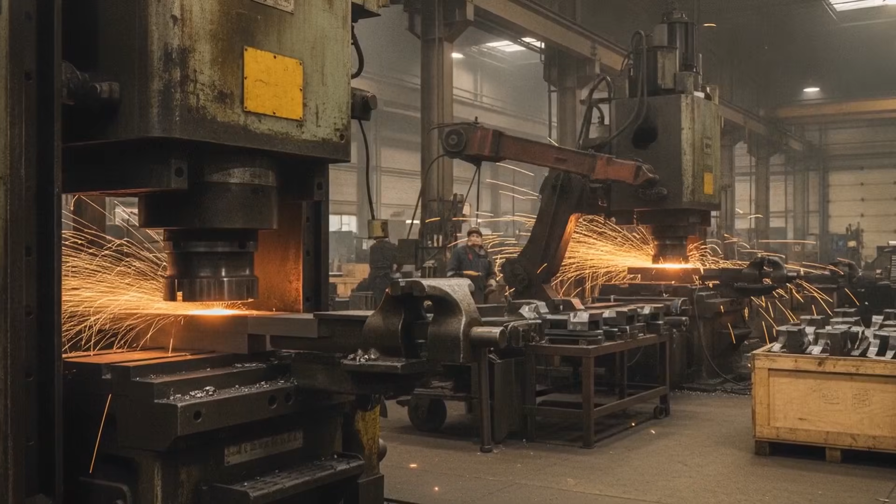In 2017, a private equity firm named Gamut Capital Management signed papers in New York to buy the company behind one of America's most trusted vise brands. Wilton wasn't struggling. Its factories were still running. Its name sat on workbenches nationwide, and mechanics had trusted it for generations.

This was the third time in 20 years Wilton had changed hands. Each new owner valued the name more than the shop floor that built it. To understand how a street corner in Chicago became a line on a private equity balance sheet, you have to go back to 1941, back to a Czech immigrant standing on a sidewalk with no company name.

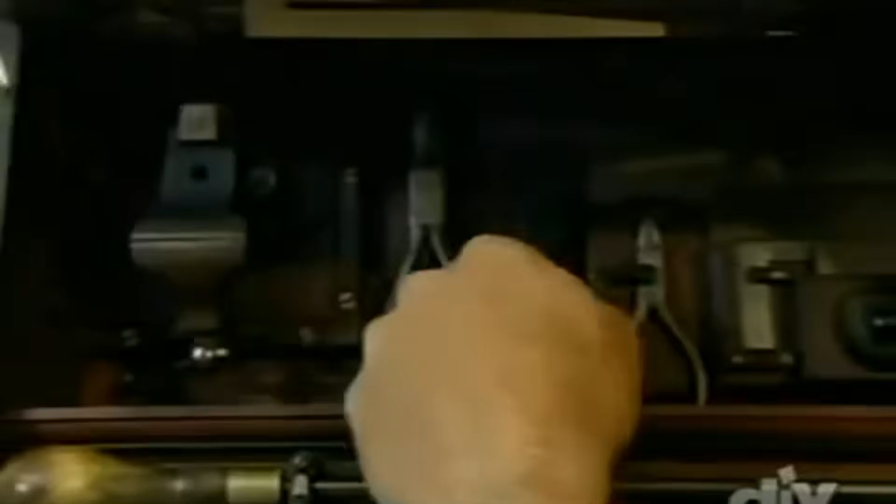His name was Hugh Vogel. He had just started a small tool business in Chicago, and he didn't even have a name for it yet. The story goes that a man walked up and asked him what his new company was called. Vogel looked up, saw a street sign, and said the first thing that made sense. The sign read, Wilton Avenue. His shop sat right at the corner of Wilton and Wrightwood.

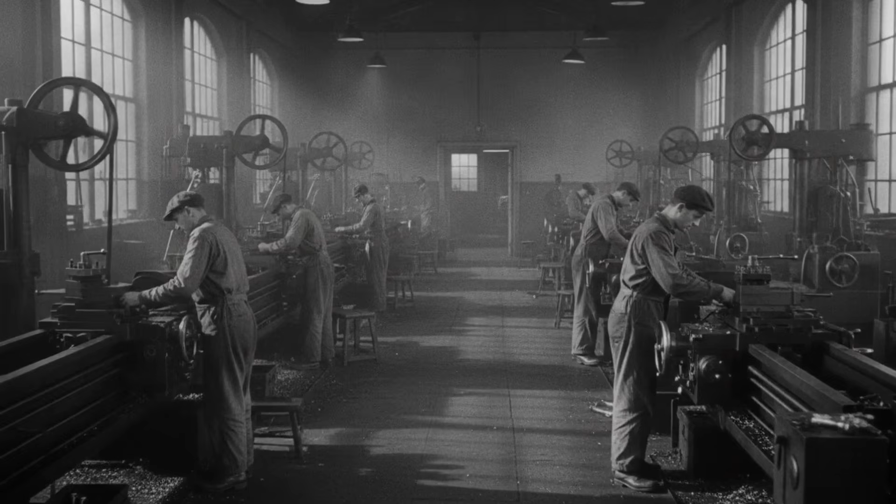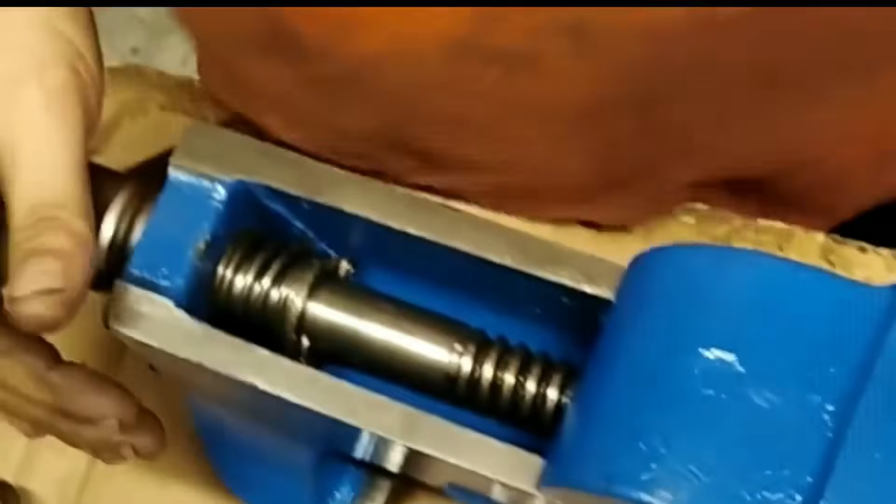That's the whole naming story. No boardroom, no marketing meeting, just a man on a sidewalk borrowing the name of the street under his feet. Vogel wasn't chasing a big idea. He was solving a problem he'd seen up close in machine shops around the city. Bench vises at the time had exposed threads on the spindle, the screw mechanism that pulls the jaws together. Metal shavings, grit, and oil work their way into those exposed threads constantly during a normal day of work.

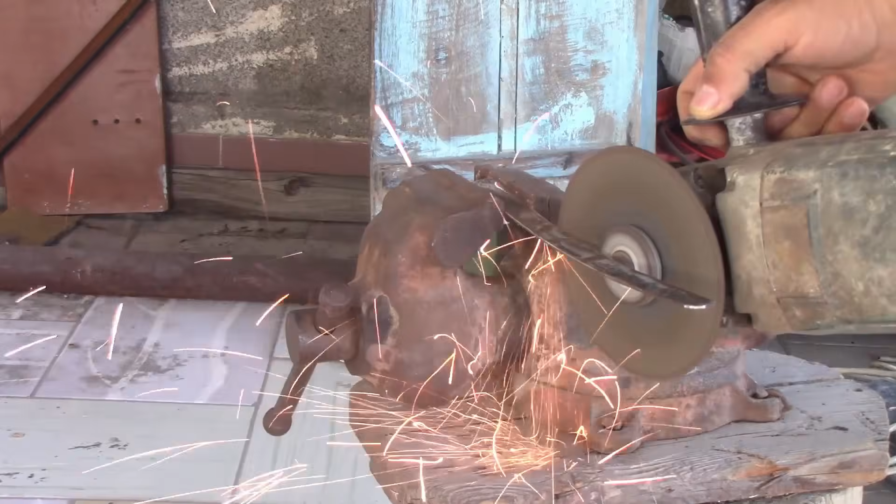Over time, the threads wore down. The vise got sloppy, and a tool that was supposed to hold a piece of metal rock steady started to slip. For a machinist trying to cut something to an exact measurement, a slipping vise wasn't just annoying. It ruined the work, and ruined work meant wasted material and wasted hours.

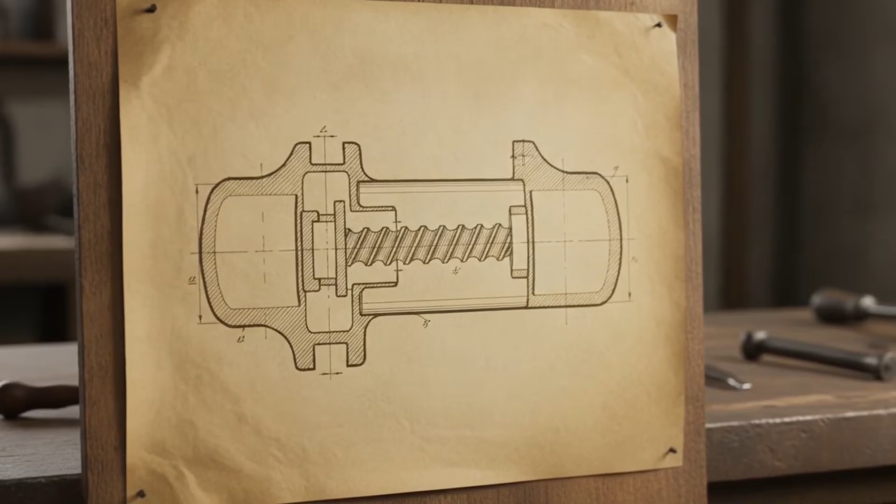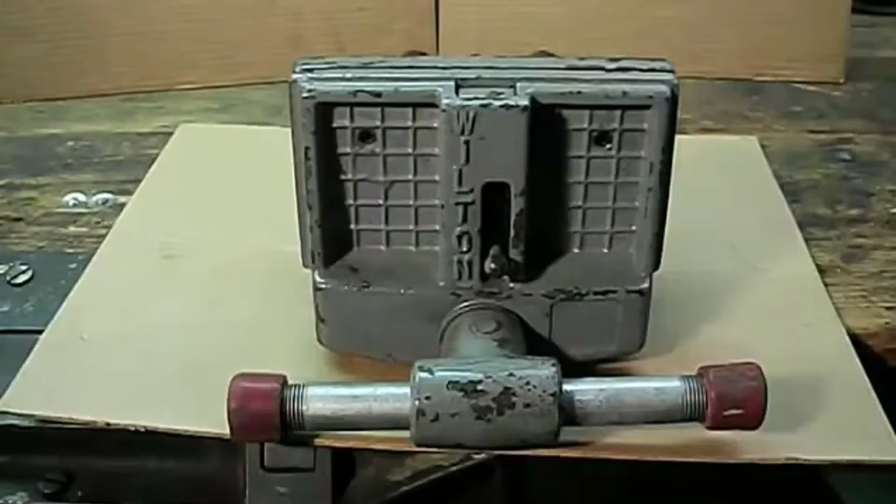Vogel designed something different. He built a vise where the spindle nut was completely enclosed, sealed away from dirt and metal chips. He shaped the whole assembly like a bullet, which is why it's still called the bullet vise today. The enclosed design kept the threads lubricated and clean. The pull on the jaws came straight through the center of the mechanism instead of off to one side.

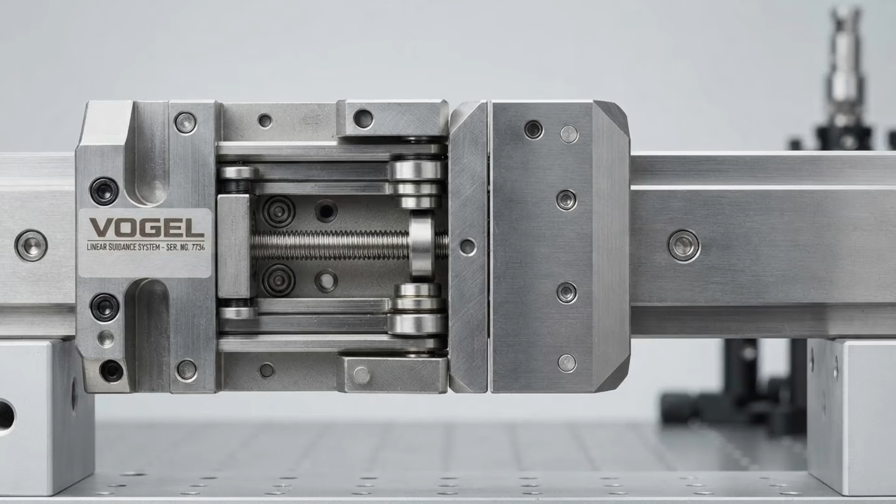That centered pull mattered more than it sounds. A vise that pulls unevenly twists slightly as it tightens, and that twist throws off precision work. Vogel's design didn't twist. It just closed, straight and solid every time, whether it was gripping a thin sheet of metal or a heavy chunk of steel. He filed for a patent on this design in August of 1941, only months after starting the company. That's a fast turnaround for a small operation with no track record and no outside investors backing him.

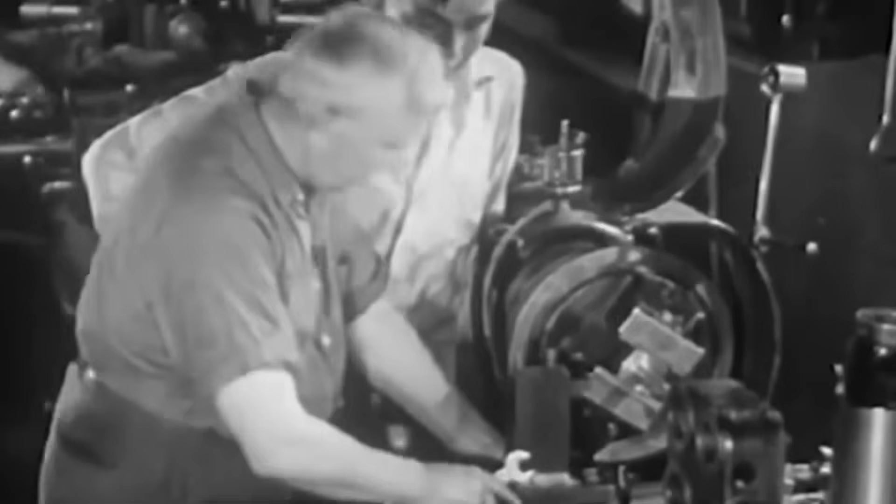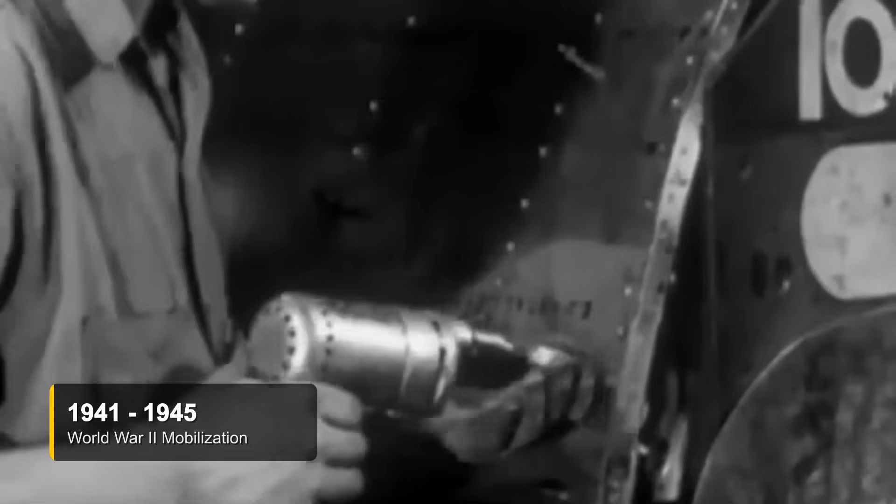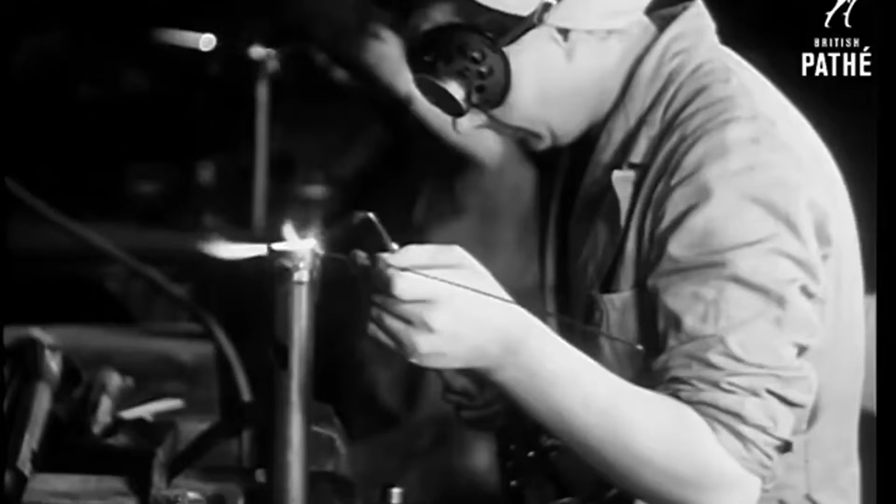But before Vogel could find out whether machinists and mechanics across the country actually wanted his vise, the decision got taken out of his hands entirely. The United States entered World War II, and for the next 4 years, from 1941 to 1945, Wilton's vises weren't sold to the public at all. They went almost exclusively to the federal government, built for munitions plants that needed dependable tools clamped to workbenches around the clock, running shifts day and night.

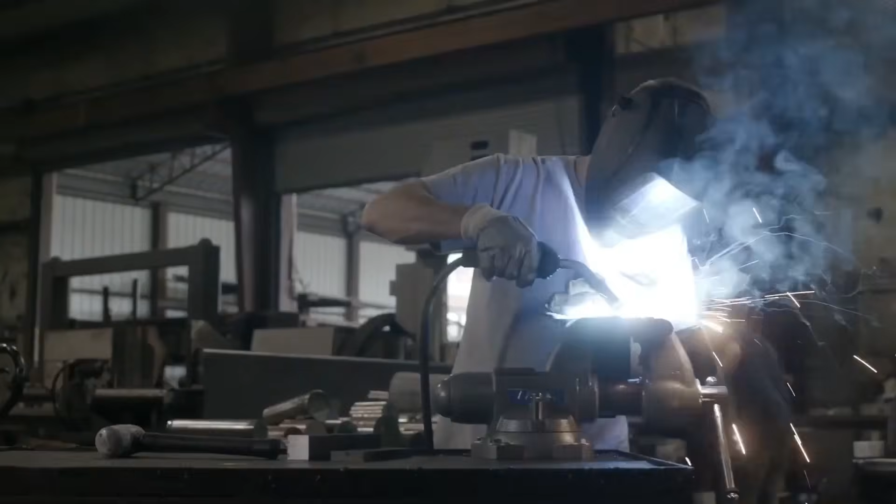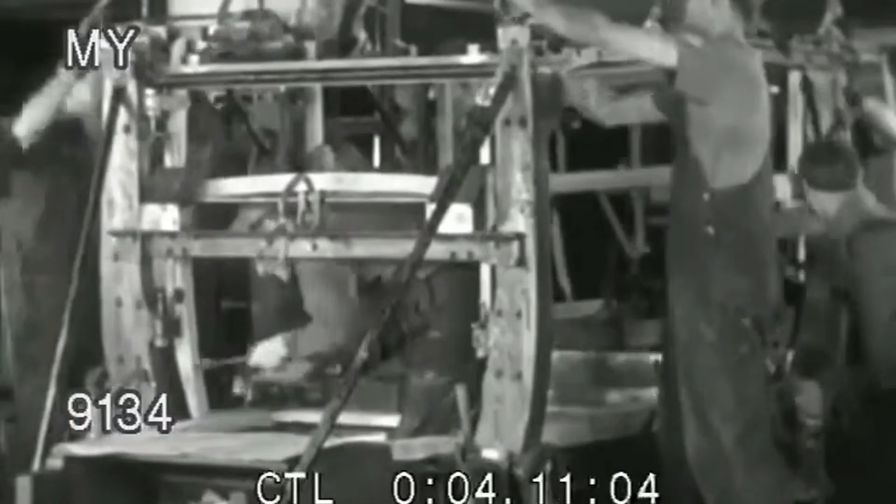This created a strange problem for a young company. Wilton had a good product and a growing reputation inside factories that were building for the war effort. But it had almost no name recognition with ordinary machinists, garage mechanics, or hardware stores. When the war ended in 1945, Wilton wasn't collapsing, but it also wasn't a household name. It was a 4-year-old company that had spent its entire existence selling to exactly one customer, and that customer was about to stop buying at wartime volume.

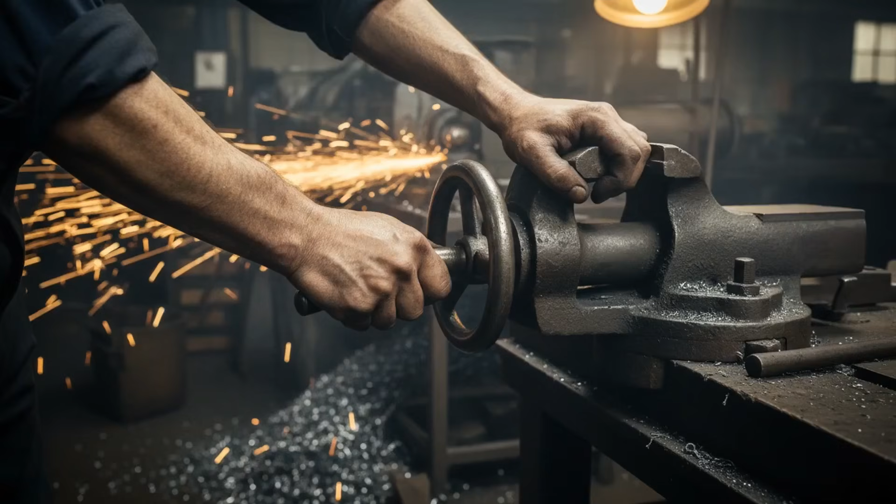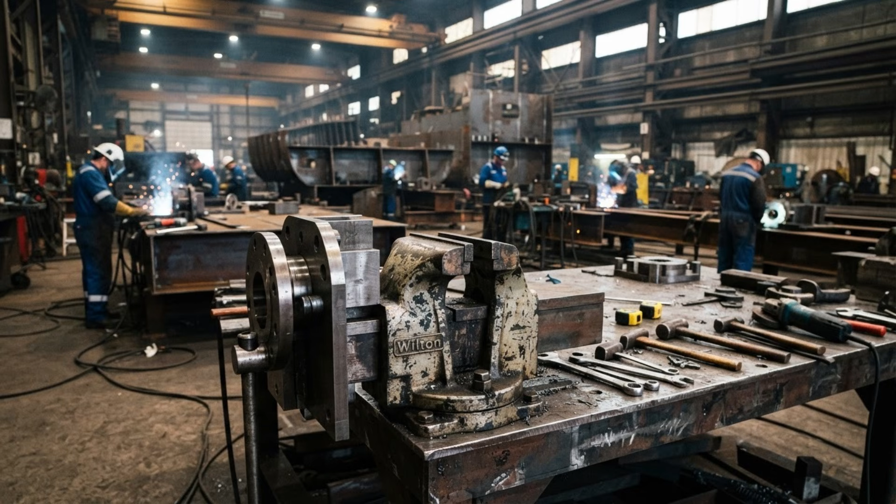What saved Wilton wasn't the war contract itself. It was who touched that vise during the war. Thousands of machinists worked in plants where Wilton vises sat on nearly every bench day after day, tightened down on parts headed for tanks, ships, and aircraft.

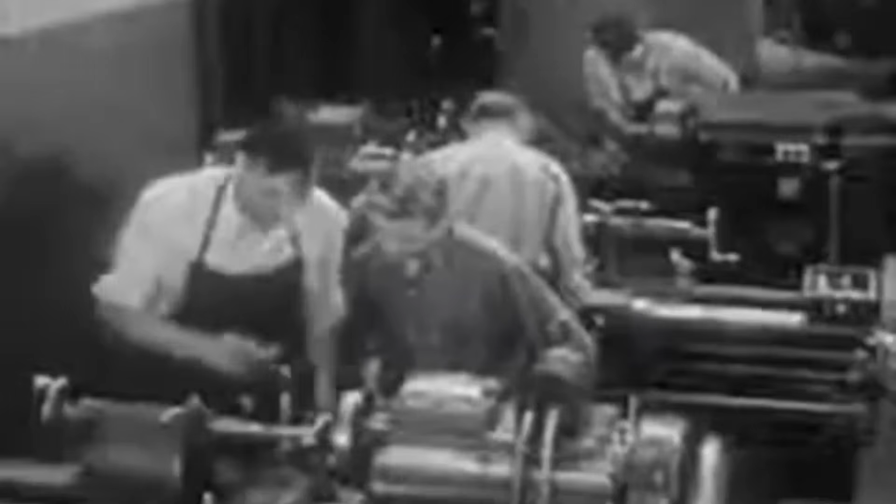Soldiers came home from the war and went to work in machine shops, auto garages, and factories, many of them having already handled Wilton tools during their training or their wartime jobs. When they needed a vise for their own workbench or recommended one to a shop owner hiring them, they already knew the name and trusted what it could do.

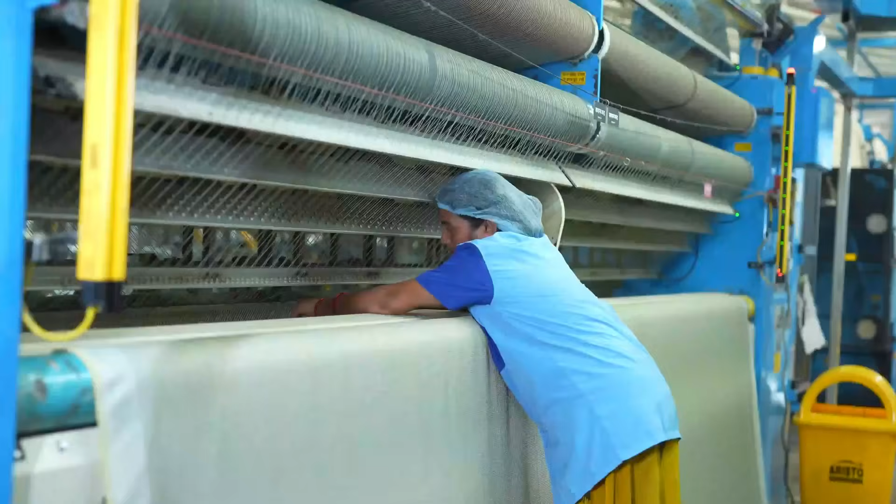The war didn't build Wilton's business directly. It built familiarity with an entire generation of skilled workers. And that familiarity is what turned into sales once the company could finally sell to the public again.

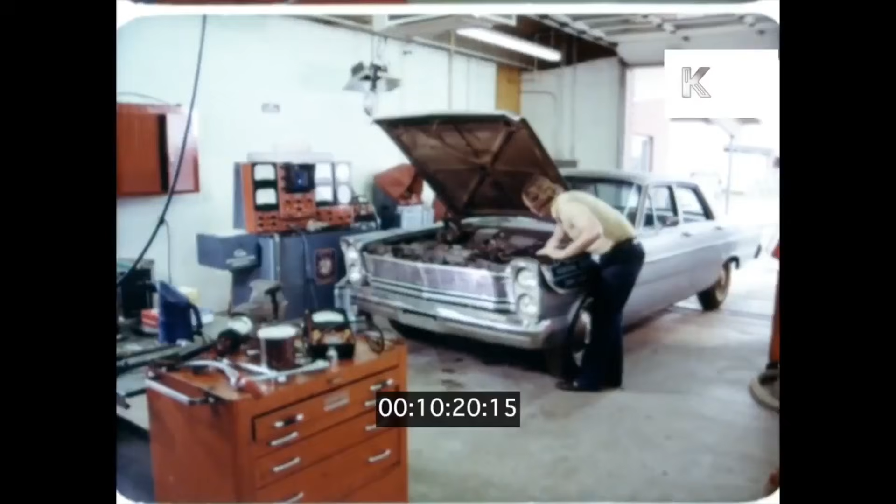Wilton made a deliberate choice after the war that shaped everything that followed. Instead of trying to sell through every hardware store in America, the company targeted the automotive supply distribution network, which was expanding fast as car ownership boomed across the country after the war. Auto parts stores and automotive supply houses became Wilton's main channel. That put the vise in front of exactly the customers most likely to actually need one, mechanics and shop owners doing real repair work every single day.

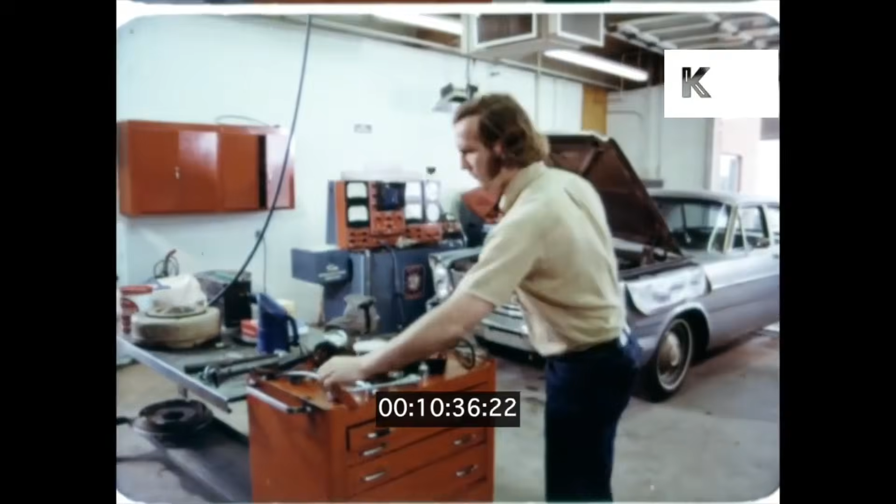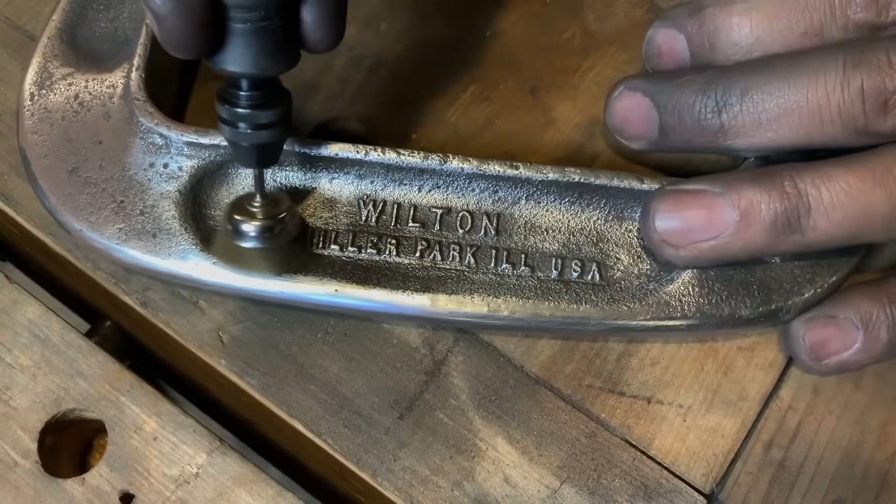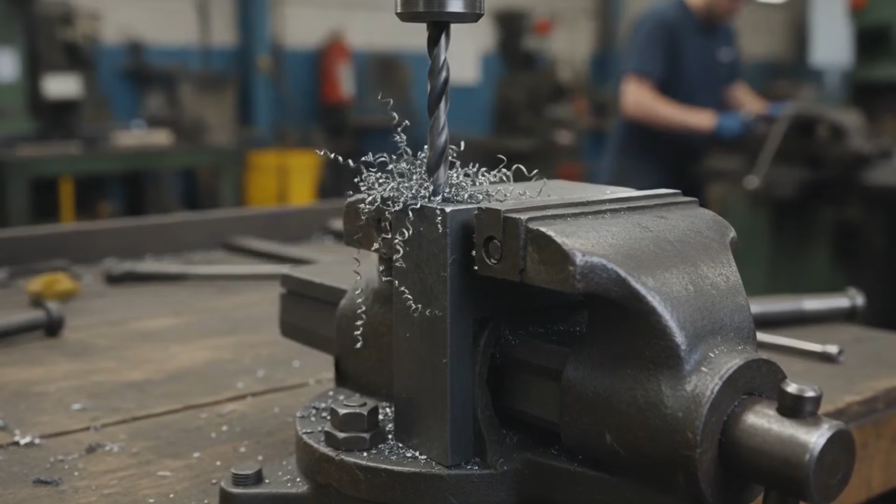In 1950, Wilton expanded beyond the vise itself, introducing its 540 series light-duty carriage clamps and its 900 series heavy-duty machinist clamps. These weren't small products. The heavy clamps were engineered to hold enormous force without failing or snapping under load. For a machinist, clamping down a piece of steel that was about to be cut or drilled, that kind of strength mattered. The clamp wouldn't be the thing that gave way and ruined the job, or worse, hurt the person operating the tool.

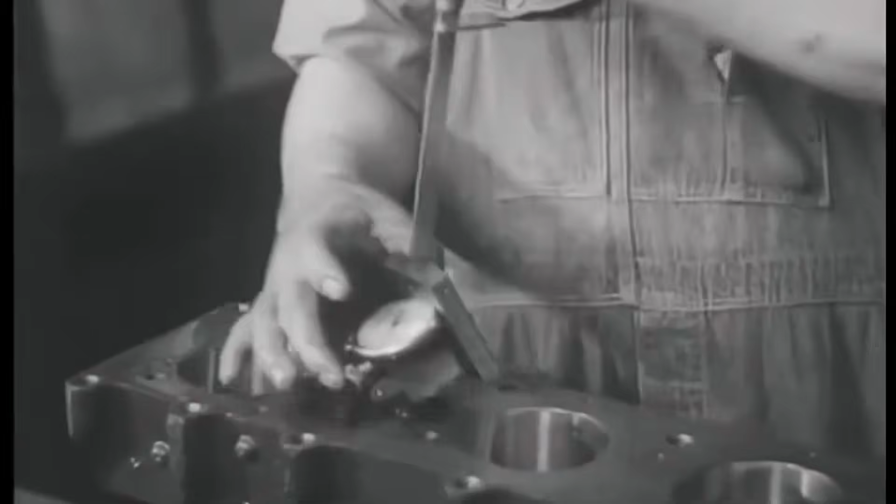Two years later, in 1952, Wilton brought in new leadership to build out a serious industrial distribution network beyond the automotive channel. This is where the company's knowledge started passing between generations. People who had grown up around the business took on more of its expansion, learning the products from the inside rather than being handed a title. That kind of continuity is exactly the thing that keeps a company's original standards alive as it grows past what one person could oversee alone.

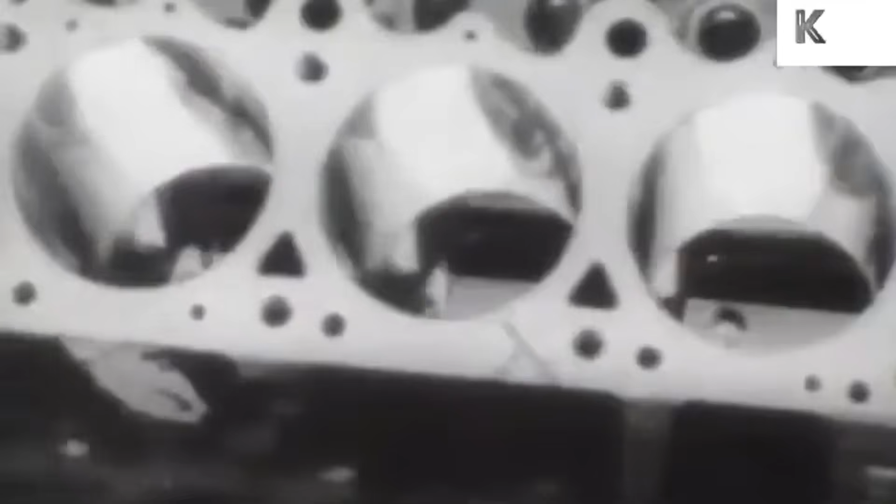By 1957, Wilton had outgrown its original Chicago location and moved manufacturing to Schiller Park, Illinois, a suburb with more room to expand production and add machinery. The move wasn't a sign of trouble. It was the opposite. Wilton needed a bigger plant because demand had grown past what the original shop could handle. The company was still independently run, still connected to the family that started it, just bigger and better equipped to keep up with orders coming in from across the country.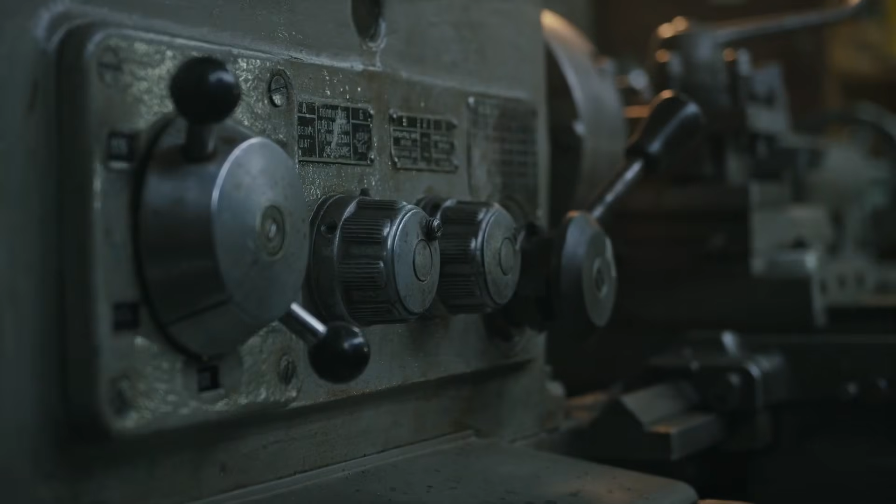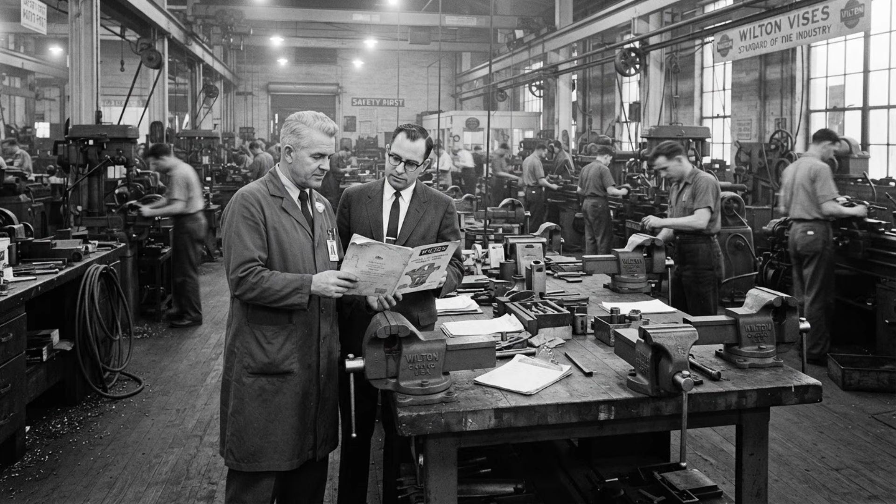The results showed up fast. By 1960, Wilton had become a recognized name across the industrial marketplace, and by 1965, it had become the preferred vise brand among professional buyers in that market. When a shop foreman or a purchasing manager needed to order vises for a new plant or a growing crew, Wilton was the default choice, not just one option among many on the shelf.

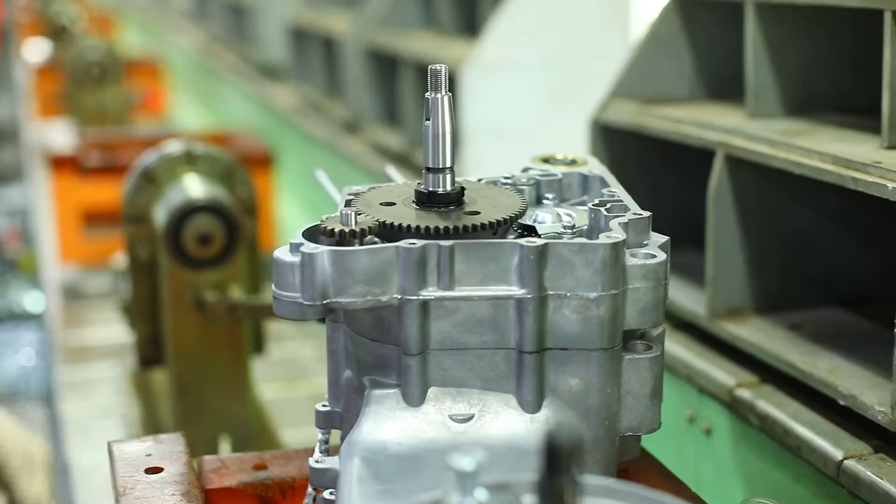In the late 1950s, the company also introduced the Pow-R-Arm, a work positioner that held a piece steady for an assembly line worker, so both of that worker's hands stayed free for the actual job. Another sign that Wilton was supplying the industrial backbone of American manufacturing, one workstation at a time.

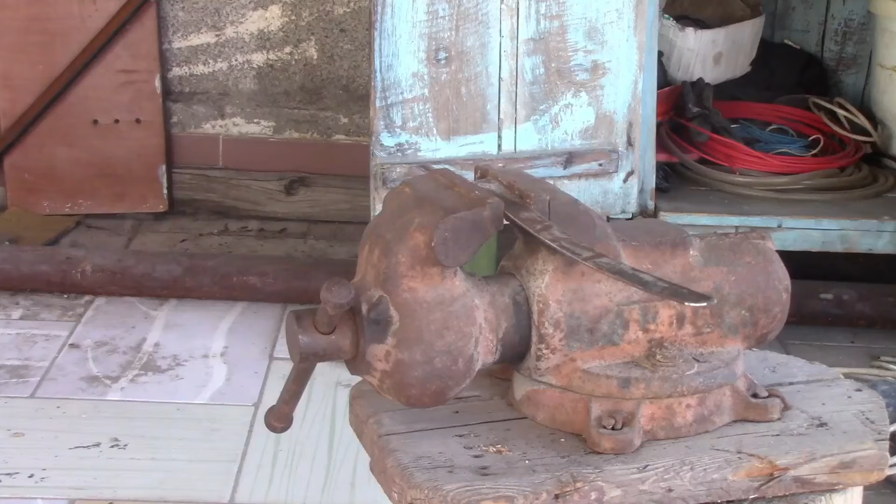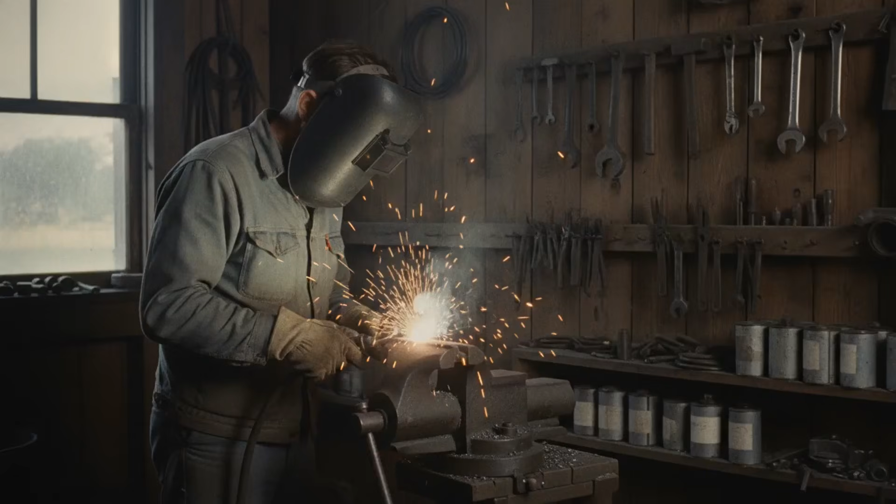This is the era people picture when they think of a Wilton vise, bolted to a workbench in a garage, sitting in a machine shop next to a lathe, mounted on a farm workbench where a broken tractor part needed to be held steady while it got welded or filed down before the next planting season. The vise outlived the jobs it was bought for. Parts stayed available for years after a model stopped being made, and the design didn't need constant redesigning because the enclosed spindle worked exactly as intended, decade after decade, through heat, cold, and constant use.

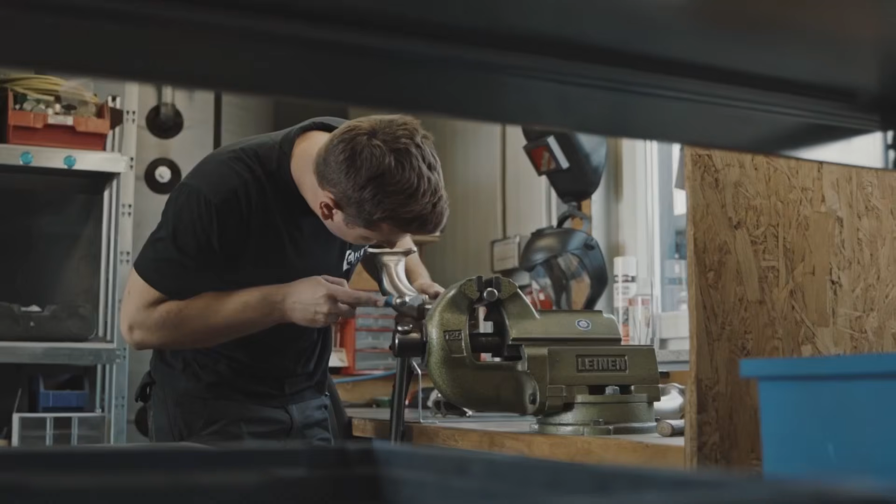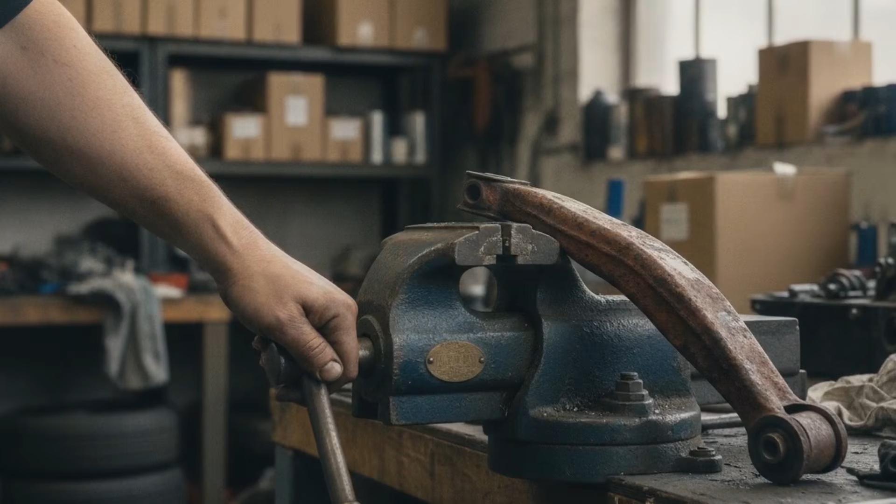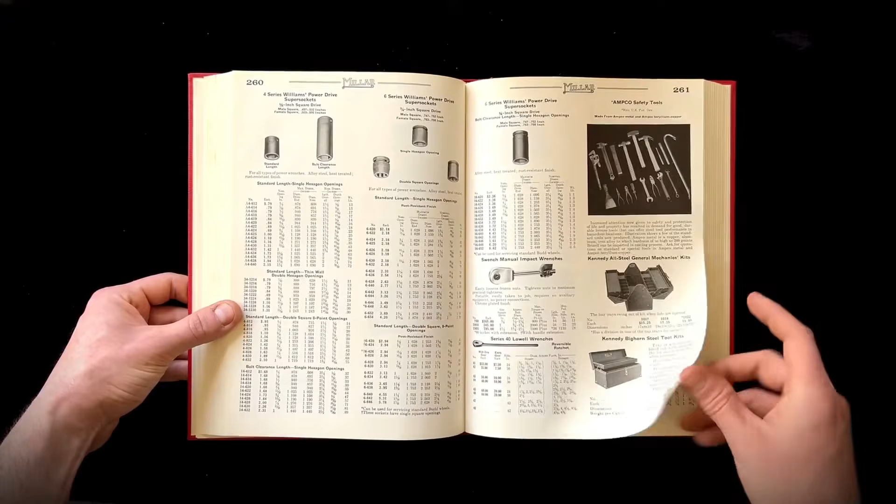A mechanic who bought one in 1962 could still be using the same vise in 1990. He'd be tightening it down on parts for a completely different car than the one he was working on when he bought it. Part of what made that possible was the dealer and distribution system underneath the product itself. A mechanic who wore out a jaw insert or cracked a handle didn't need to replace the whole vise. He could order the specific part through the same automotive supply house that sold him the tool, because Wilton kept components standardized across model years instead of redesigning them every season.

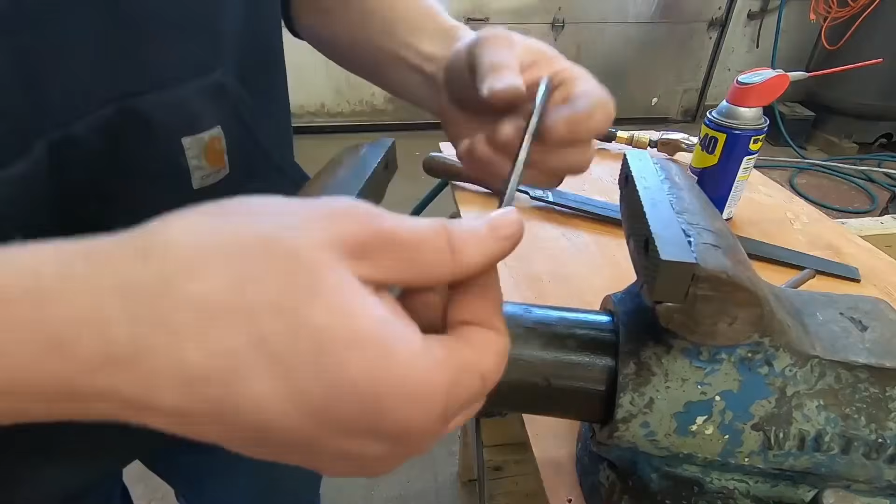That kind of consistency turns a customer into a habit. Once a shop trusted the parts pipeline, switching brands meant giving up years of built-up convenience, and most shop owners simply didn't bother.

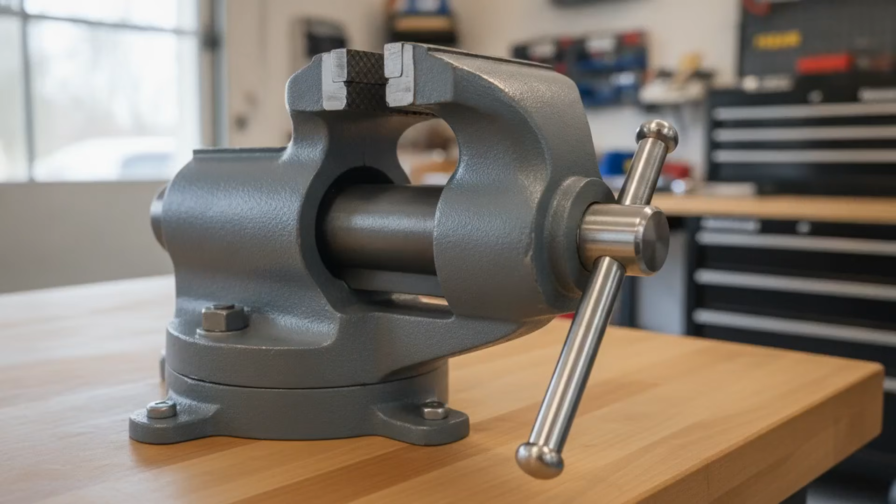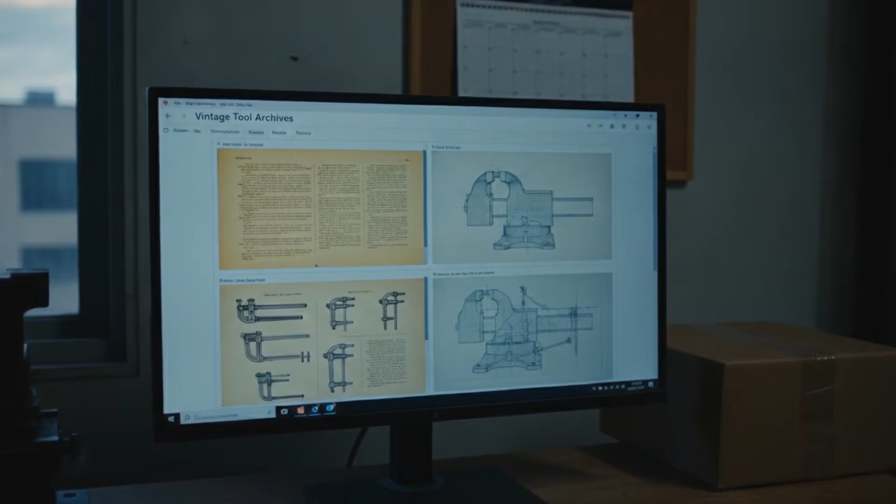That loyalty didn't stay confined to working shops. Decades later, it resurfaced somewhere Hugh Vogel could never have predicted. Online forums, where collectors and machinists argue over Wilton history the way other people argue about vintage cars. On sites like Practical Machinist and the Garage Journal, longtime users trade scanned pages from decades-old catalogs.

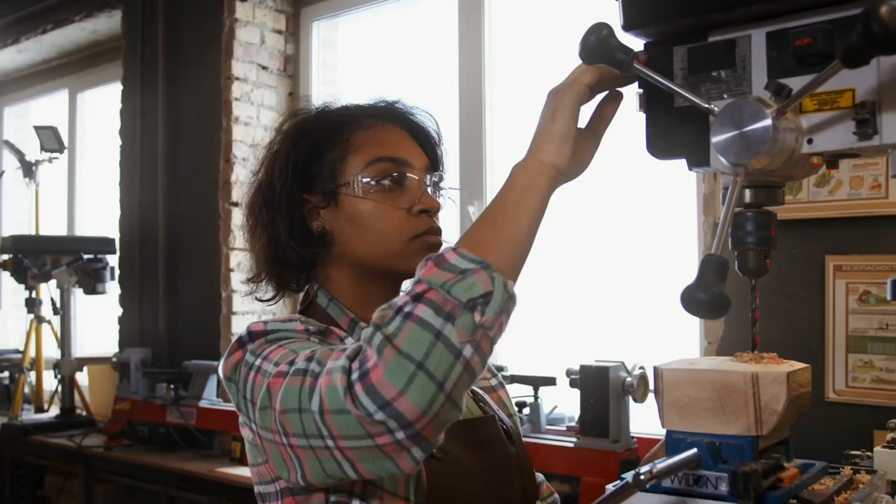They're trying to pin down exactly when a swivel base or a particular clamp model first appeared, since the company's current corporate owners have never bothered to preserve or publish that history themselves. One collector spent years compiling patent numbers just to date his own vise. Another still has the original 1956 catalog listing the Wiltomatic Power Bench Vise, a model most current employees of the company have never even heard of.

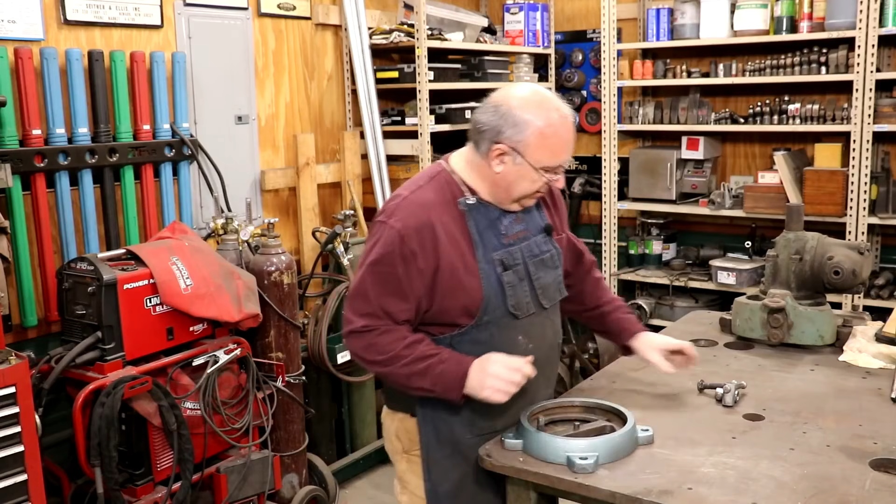That kind of obsessive record-keeping doesn't happen for a tool nobody cares about. It happens when a machine earns the kind of loyalty that outlives the company that built it. But everything that made Wilton valuable also made it a target. A trusted name, a loyal customer base, a strong distribution network, and decades of manufacturing knowledge don't just serve customers. They also show up as assets on a balance sheet. That's the kind of asset that attracts buyers who are less interested in vises and more interested in what owning a respected brand can do for their business on paper.

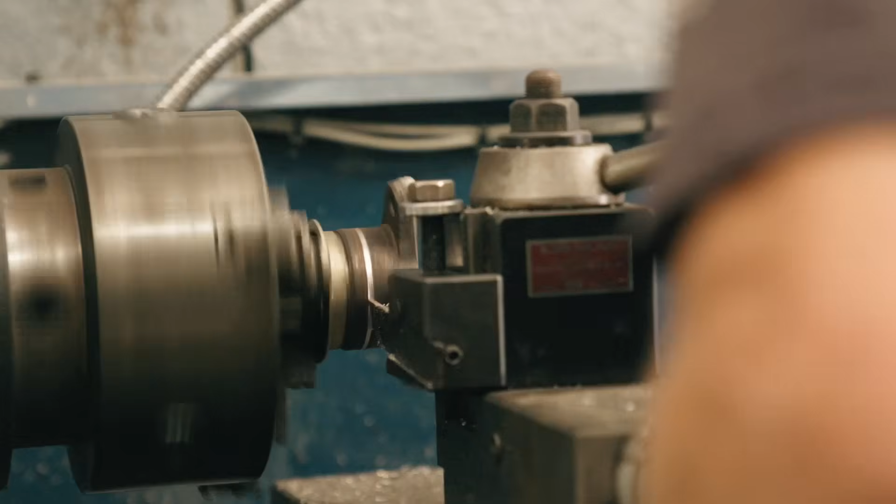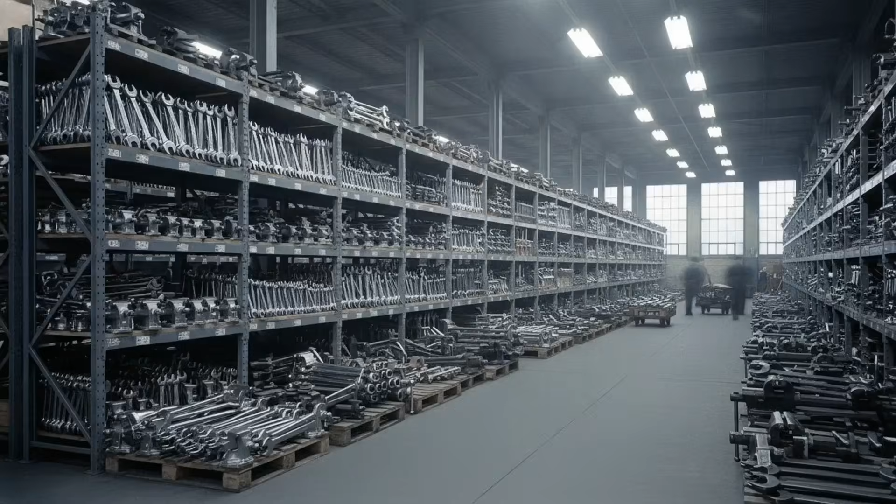In 1994, Wilton Corporation, based in Palatine, Illinois, merged with Warren Tool Group, which owned the Columbian Vise brand along with several other tool companies. This combination made Wilton bigger and more diversified than it had ever been. It also made the company a more attractive target for a much larger buyer, since now a single purchase could deliver not just Wilton, but an entire portfolio of established tool brands in one transaction.

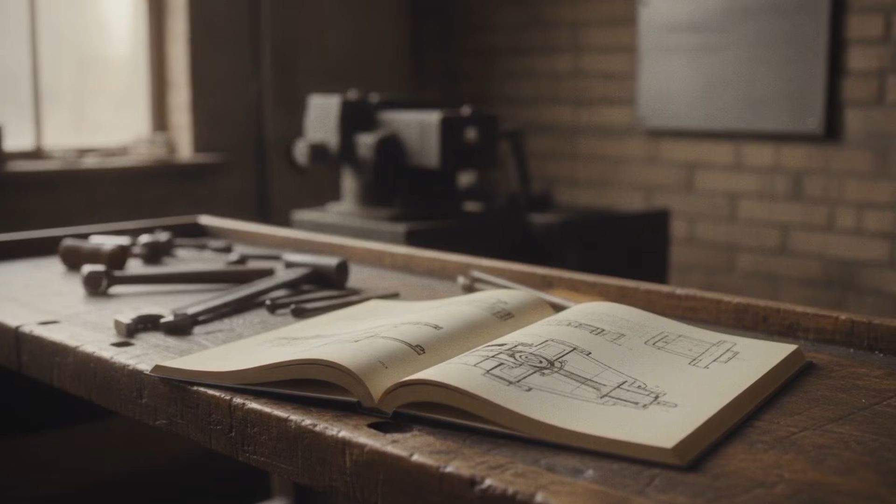That buyer arrived in 2002. WMH Tool Group, the American arm of Walter Meier Holding, a company based in Switzerland, acquired the combined Wilton Tool Company and Warren Tool together. For the first time since Hugh Vogel stood on that Chicago sidewalk, the Wilton name belonged to a foreign parent company, sitting inside a portfolio that also included the Jet and Powermatic tool brands. The transaction price was never publicly disclosed, but the operational changes that followed were very visible to anyone paying attention.

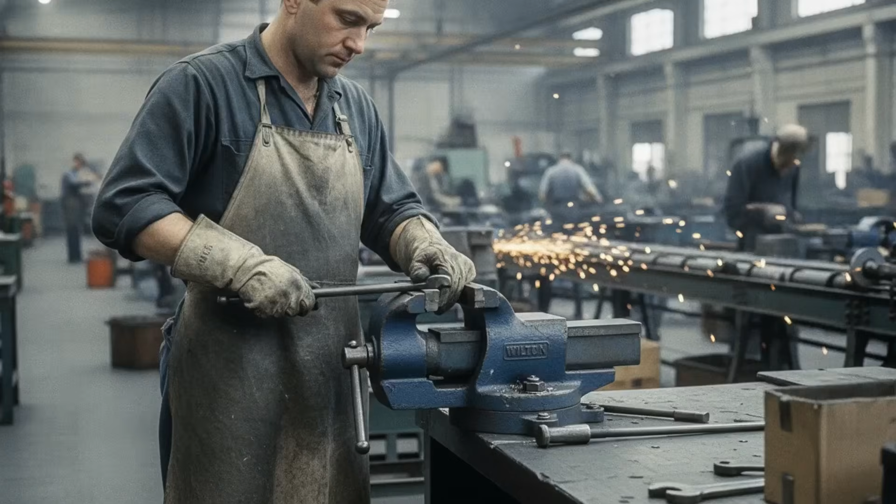Manufacturing moved from Schiller Park to Carpentersville, Illinois, another Chicago area location, so the vises were still being built in the region where the company started. But the decisions about that manufacturing were no longer being made by anyone connected to the Vogel family. They were being made inside a Swiss industrial group managing several unrelated brands at once. In 2008, the company moved its headquarters from Elgin, Illinois, to La Vergne, Tennessee, outside Nashville. Wilton, a company born on a specific street corner in Chicago, no longer had any offices in Illinois at all.

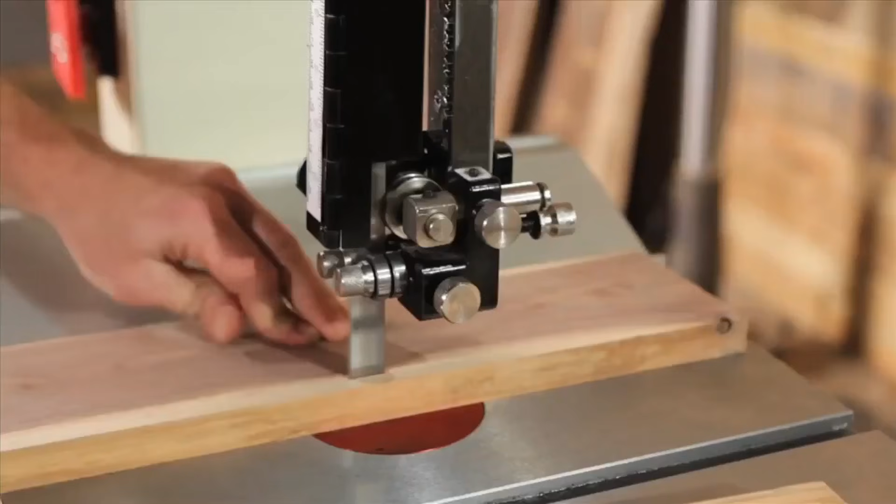The ownership chain kept moving. In 2013, Walter Meier decided to divest its entire tools division, selling the Jet, Powermatic, and Wilton brands to Tenex Capital Management, a private equity firm based in New York. The operating company was renamed JPW Industries. Tenex wasn't a tool company. It was an investment firm that bought businesses, improved their financial performance over a few years, and eventually sold them again for a profit. Wilton had gone from a family-run manufacturer to a division of a Swiss conglomerate to a private equity holding in the span of just over a decade.

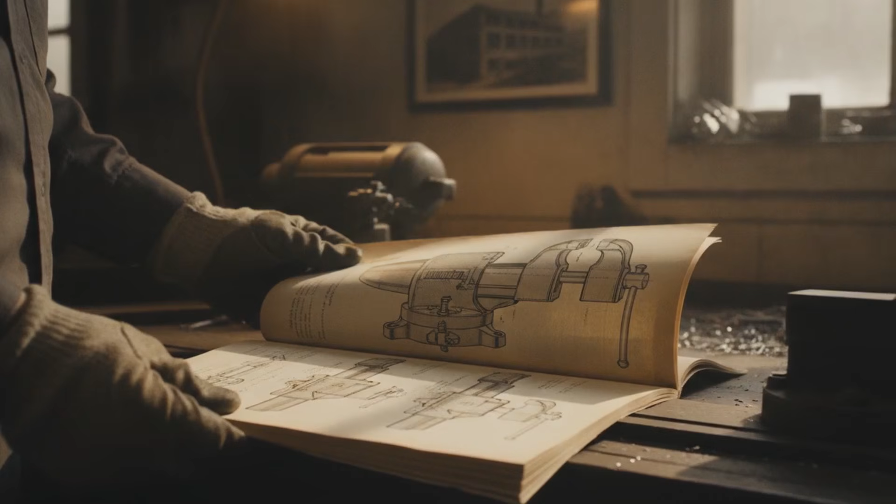Then in 2017, Tenex sold JPW Industries and the Wilton brand along with it to Gamut Capital Management, another New York private equity firm. This was the third ownership change since 2002, and the second time private equity specifically had taken control of the business. Each of these owners inherited the same trademark, the same catalog, and the same customer trust that Hugh Vogel had spent decades building brick by brick. None of them inherited a Chicago machine shop, a founding family, or the original manufacturing culture that created the vise in the first place.

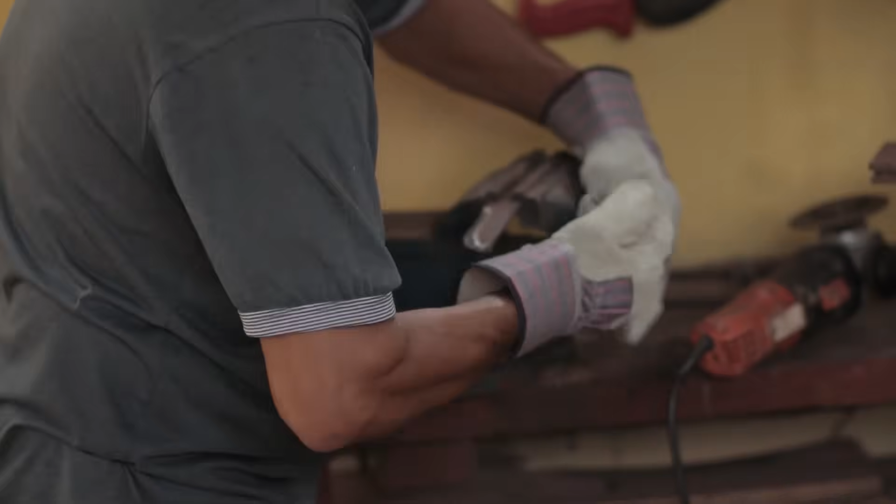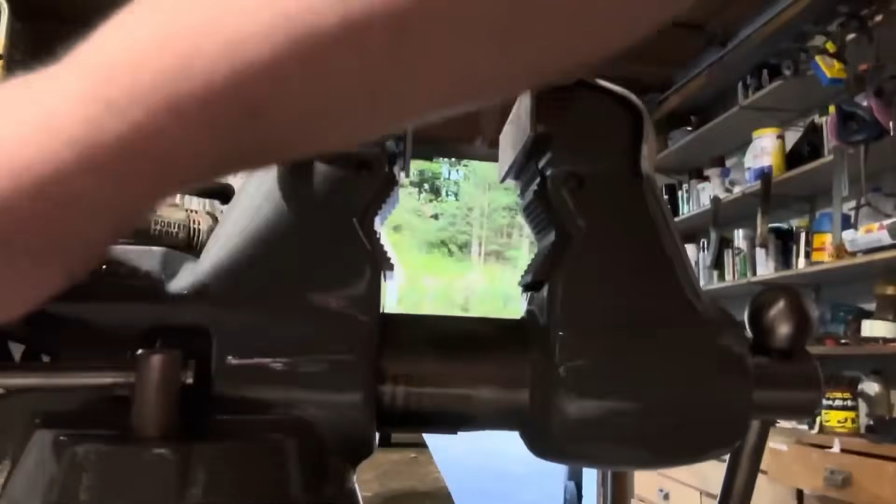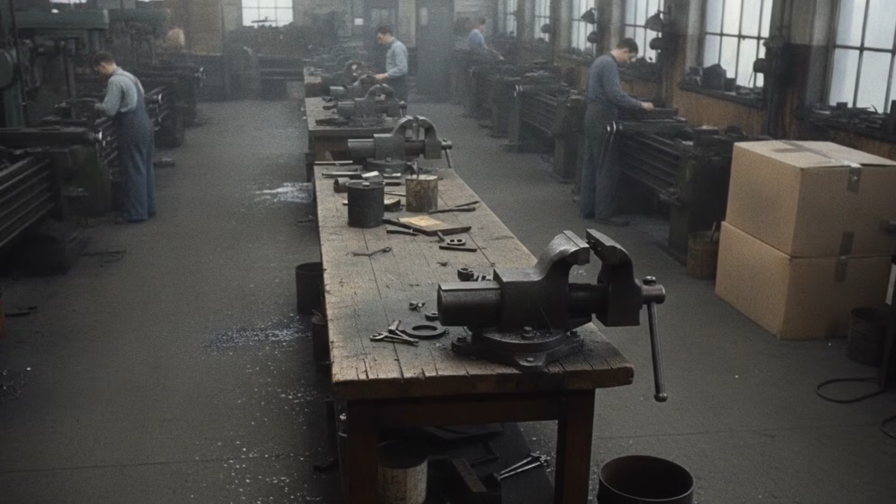Here's the part that complicates the obvious story. It's tempting to blame one villain for whatever happened to Wilton's identity afterward, but Wilton was never bankrupt, and it was never in financial distress when any of these sales happened. The real pattern isn't a single betrayal. It's a slow chain of ownership, moving the company further and further away from the people who actually understood how the product worked. Family control gave way to a multi-brand conglomerate.

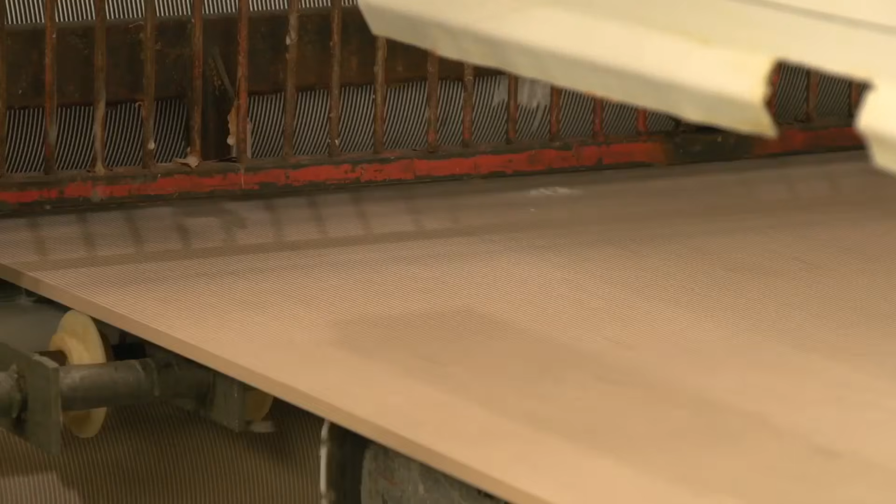The conglomerate gave way to one private equity firm. That firm sold to another. Each step made sense financially to the people involved at the time, and each step also added distance between the decision makers and the factory floor where the actual work happened. That distance eventually showed up in the product itself.

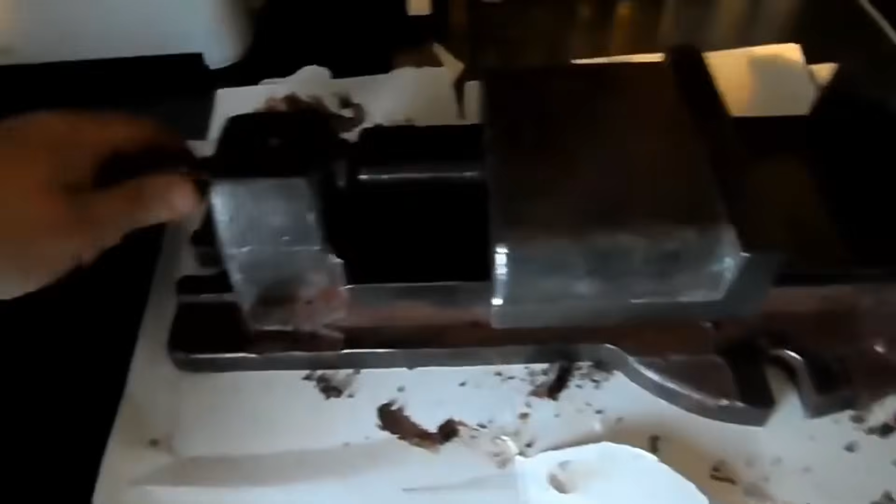Starting around 2018, Wilton began shifting production of its tradesman line of vises to Taiwan, and some models have been documented by buyers and dealers as coming from China as well. Longtime users and dealers have noted that the newer Taiwan-produced models rely on imported components throughout, in contrast to the American-sourced parts used in the U.S.-made lines.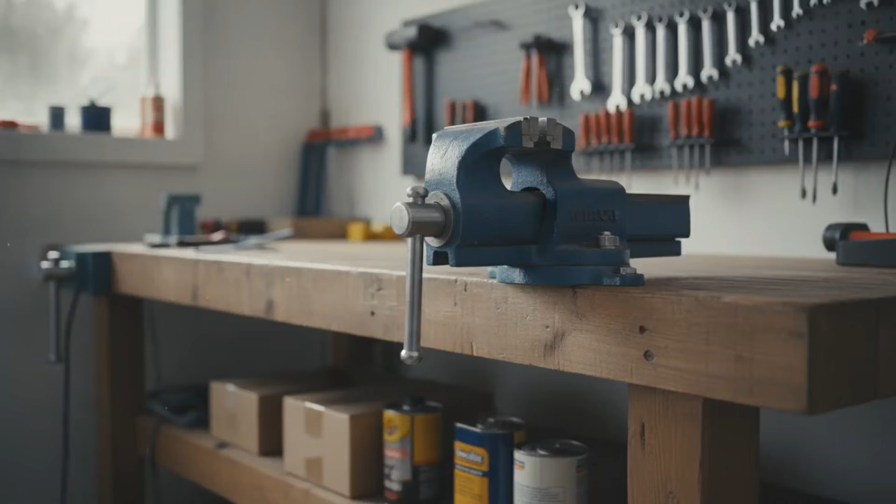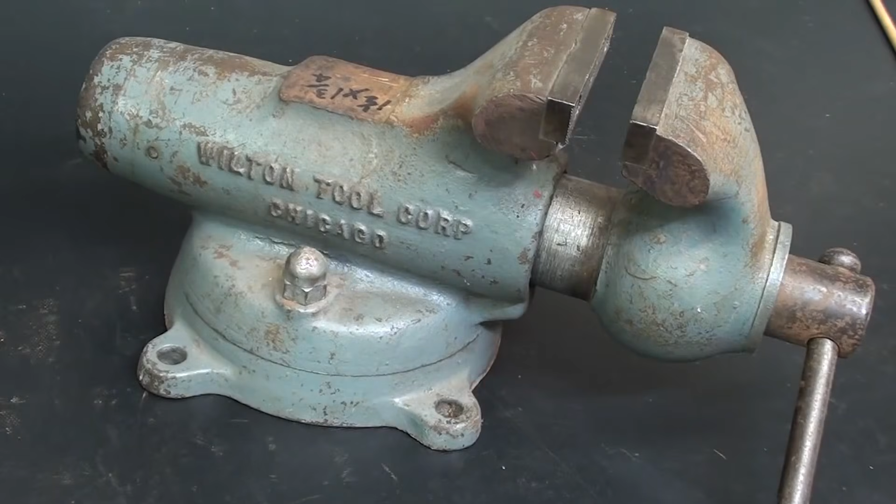Some buyers and dealers have also reported that certain imported models carry shorter warranty terms than the lifetime warranty Wilton vises were known for. This wasn't a total collapse, and it's important to be fair about what changed and what didn't. Wilton's machinist vise line and its combination pipe and bench vise line have continued to be built in the United States, sold right alongside the imported tradesman models from the same catalog.

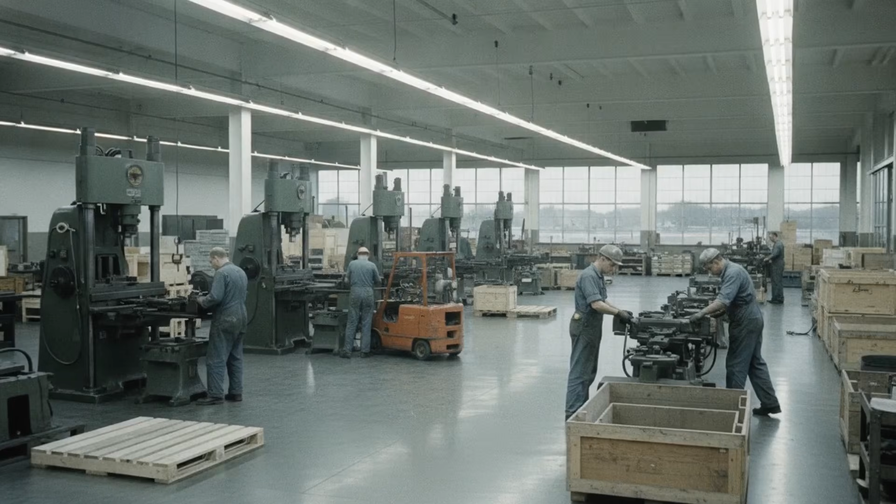JPW Industries didn't abandon American manufacturing across the board. It split its product line, likely to compete on price against cheaper import competitors undercutting Wilton on cost. Whether that split was the right call is something longtime users still argue about in machine shop forums and tool collector groups, and reasonable people land on different sides of it.

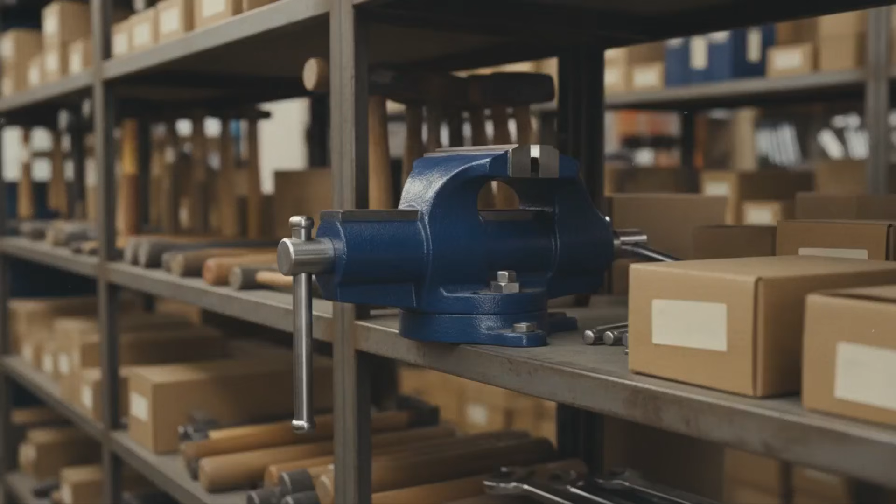So where does that leave the company today? JPW Industries, still owned by Gamut Capital Management, still headquartered in La Vergne, Tennessee, still sells vises under the Wilton name to hardware stores, industrial suppliers, and online retailers across the country. The trademark is alive. The catalog is full.

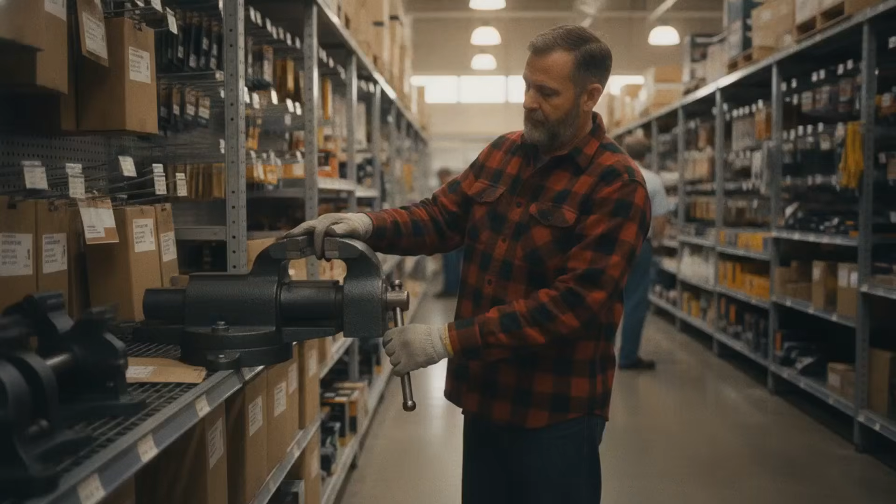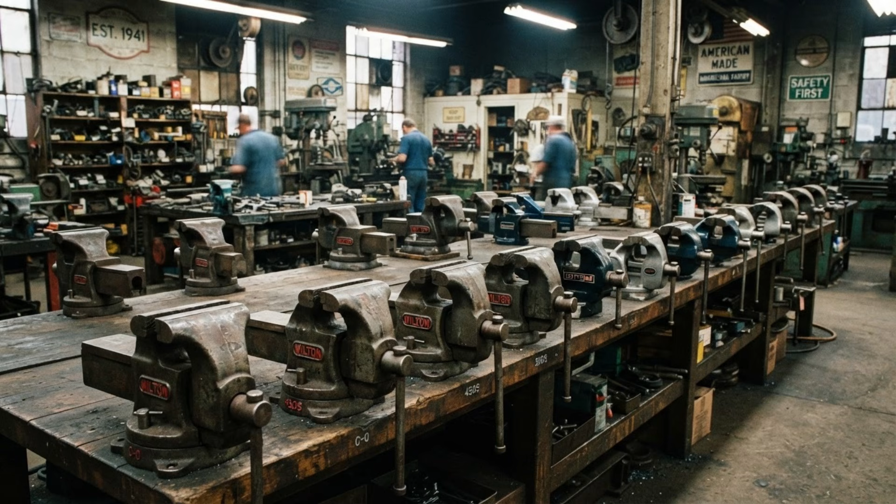The reputation, built over 80 years of steady use in real shops, still carries weight with buyers who don't know or don't ask where a particular vise was cast before it reached the shelf. What doesn't survive is the unified identity Wilton once had. That was a company where every vise, regardless of model or price point, came out of the same American factory. Every one was built by workers trained under the same standards Hugo Vogel set when he sealed that first spindle against dirt and grit back in 1941.

So did Wilton become America's vise brand? Yes, and that part of the story is completely real and fully earned. Between 1941 and 1965, a Czech immigrant with no company name solved an actual mechanical problem that machinists dealt with every day. He survived a war that nearly kept his product out of civilian hands entirely, and built a distribution network that made his vise the default choice in machine shops across the country.

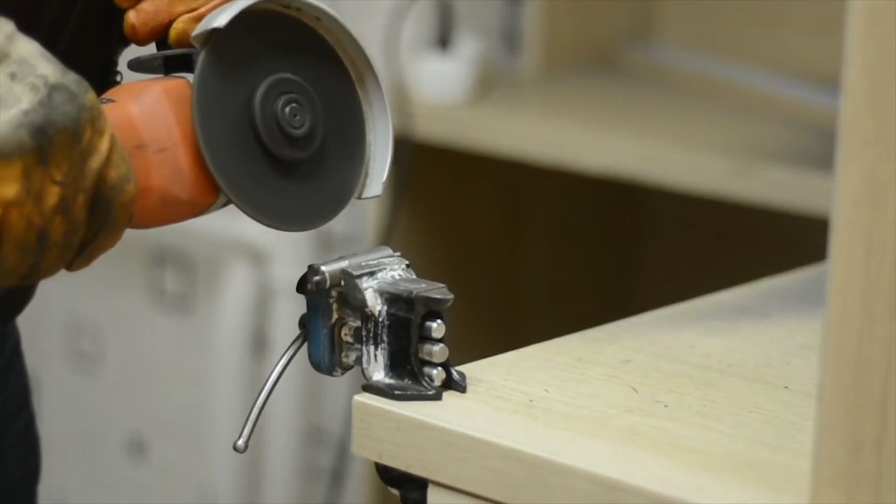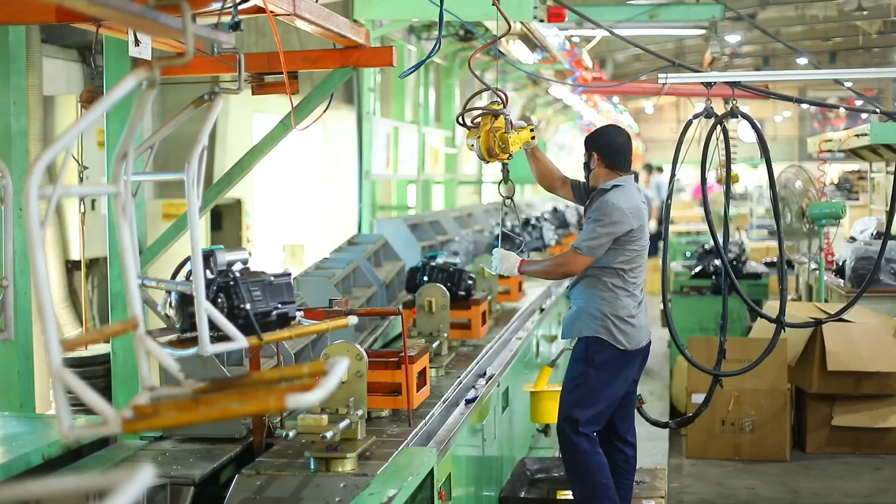That achievement wasn't inherited or bought with someone else's money. It was built, one enclosed spindle at a time, by people who understood exactly what a shop worker needed from a tool that had to hold steady under pressure for decades of hard, repeated use. What Wilton is today is a different kind of achievement and a different kind of story entirely. It's a trademark that survived 5 ownership changes by staying valuable enough that every new owner wanted to keep using it, even while gradually changing what stood behind it piece by piece.

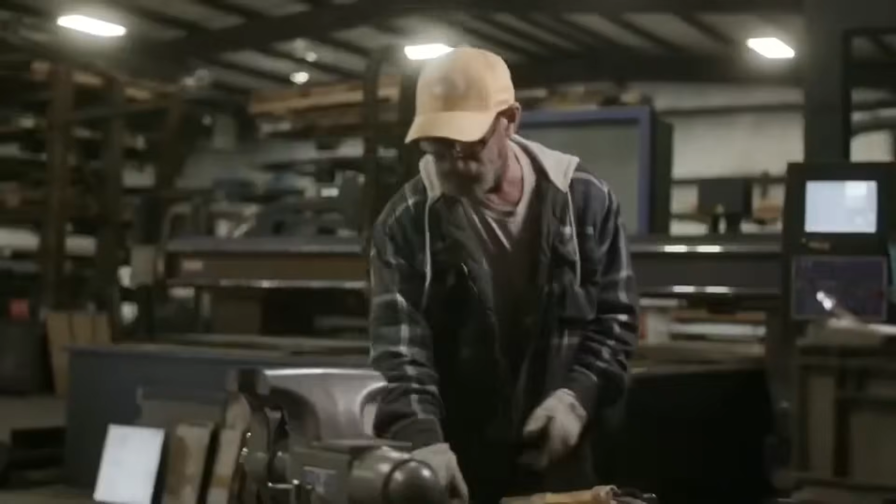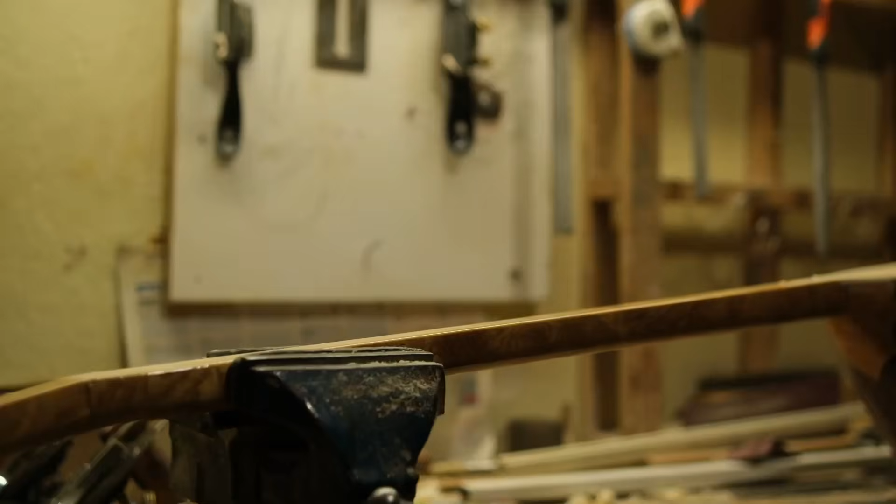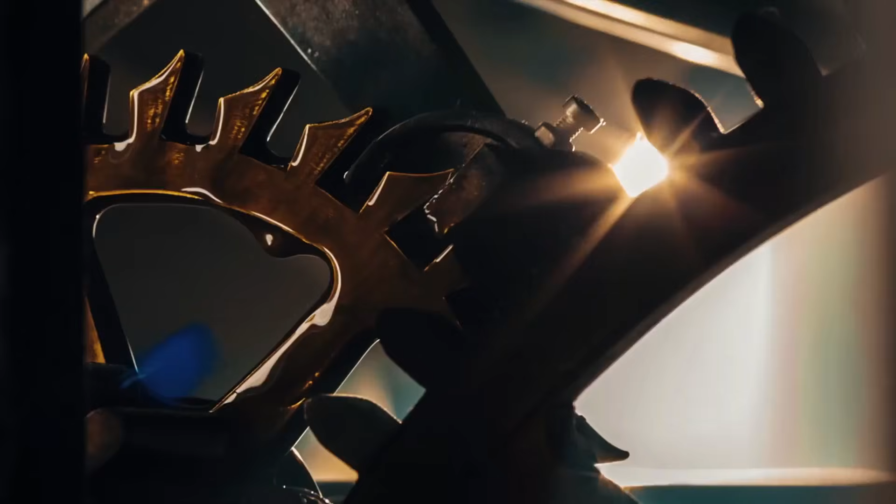The name outlived the company that built it, and the bullet-shaped vise outlived the sidewalk conversation that gave it a name back in 1941, long after everyone involved in that conversation was gone. Picture 2 vises sitting on the same modern workbench. One is an old Wilton, cast decades ago in Chicago, or Schiller Park. Its brass swivel bolsters worn smooth from years of hands turning that base into position. Clamp something in its jaws today, and it still grips true, the spindle still pulling straight and even. That's exactly the way Hugo Vogel designed it back when he was still figuring out his own company's name.

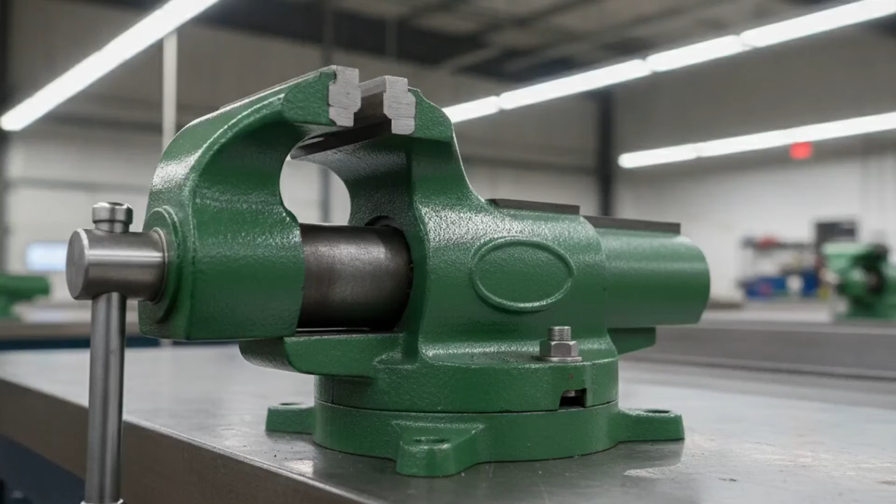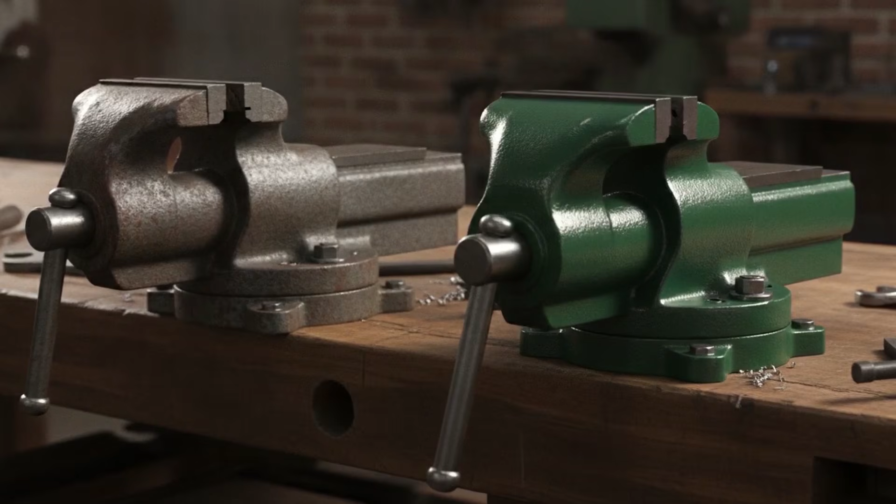Next to it sits a newer Wilton, cast more recently in Taiwan. Same bullet shape stamped with the same familiar logo. Both say Wilton. Both still close tight and hold their work. But only one of them was built by a company that knew, firsthand, why that shape mattered in the first place. A name can survive almost anything you throw at it. The understanding behind it is a lot harder to keep alive.